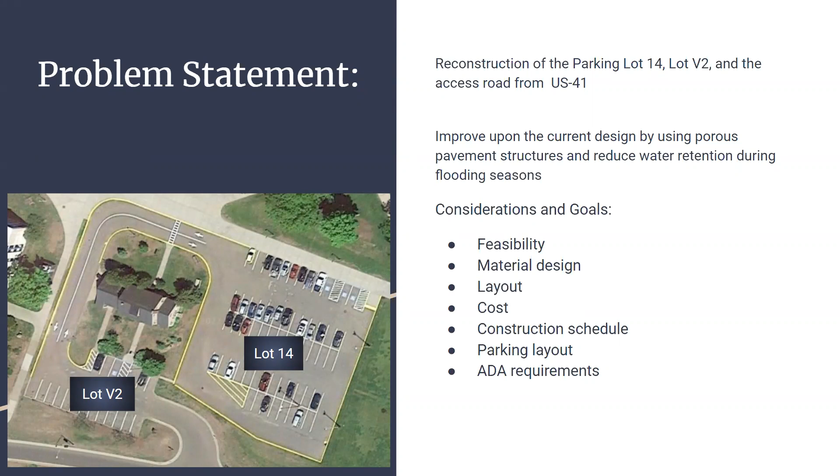Our considerations and goals were the feasibility of this design, the material designs of our porous pavement, the parking layout, our cost, the construction schedule, and our ADA requirements. So our current conditions: the known flooding problem in the southeast corner.

We didn't have any data under the pavement, so we went with web soil survey for our current soil conditions, which gave us an AASHTO A-2-4 or A-3 sandy soil, which has a good to excellent drainage rating, meaning it could possibly be used in our design.

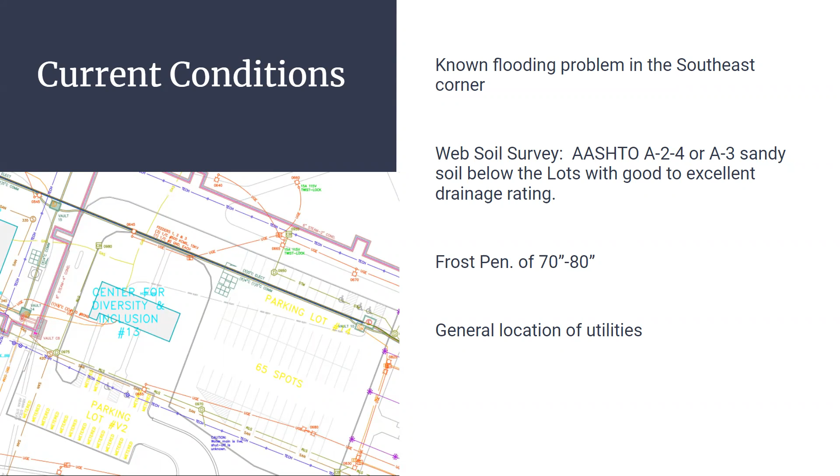We also have a frost penetration of 70 to 80 inches. It's good because Houghton is quite cold, and we have a general location of our utilities.

With this given information of our utilities, we have active storm and sanitary sewers, gas lines, water, electric, and steam vents. The concerns about these immediately were we had some abandoned electric, sewer, and steam lines.

No depths on these utilities. The sanitary sewer structures, just because we don't have depths, we don't know where they're at. And the southern water main has approximately 230 feet stretch of pipe that has no known shutoff.

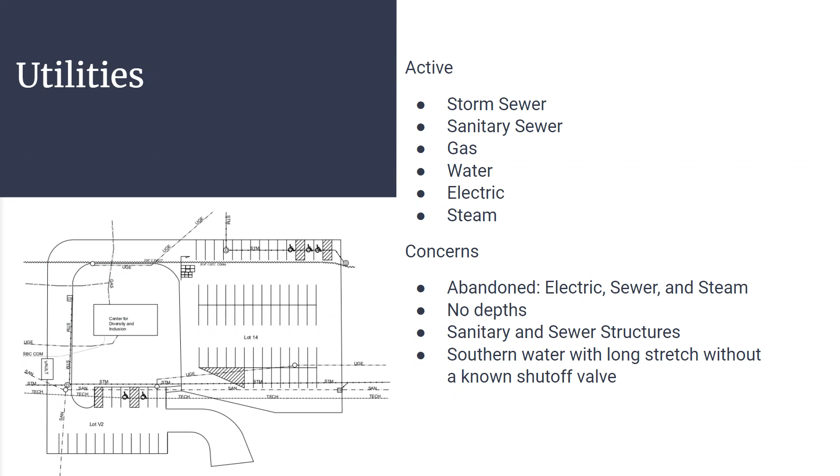So porous pavement is an asphalt that allows the water to seep through it into the ground below. Usually they will have a stone reservoir along with various other layers where the water can be held until it can be naturally absorbed into the soil below.

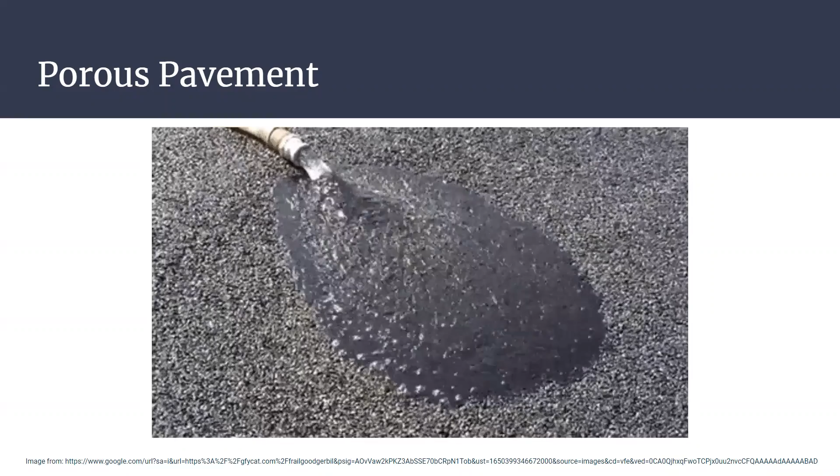On this slide, you can see a nice little demonstration of porous pavement. With normal pavement, if you've ever seen water on it, it usually just kind of spreads out and then goes to the nearest flow point. But with porous pavement, it just goes straight down.

Here's also a couple pictures that show the difference between traditional pavement and porous pavement. As you can tell, the porous pavement is a lot drier, a lot quicker than the conventional, which is very useful because it can reduce runoff as well as flooding, which is lot 14's problem.

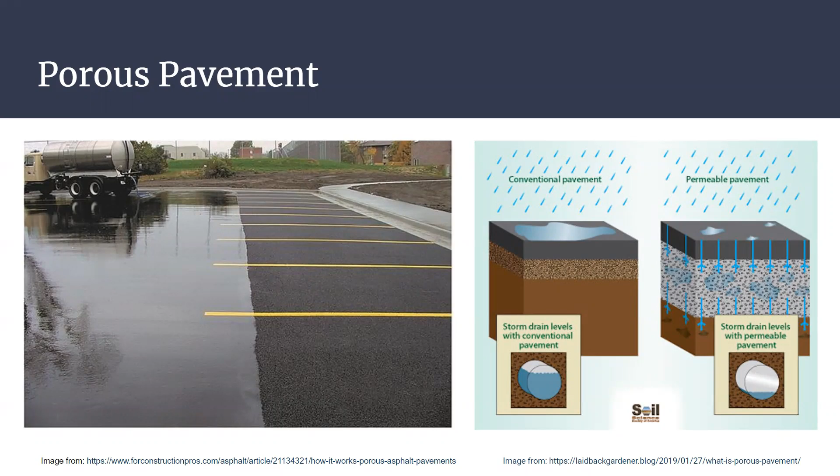For our research, our main document was the UNHSC document provided to us. That, along with some other references, gave us these main points.

The stone reservoir should have voids of about 30%. It should also have a minimum of a 19-inch thickness for a 500-year storm. Unfortunately, due to multiple constraints, we weren't able to achieve 19 inches for thickness, but it should still be able to handle at least a 100-year storm.

The slope of the pavement cannot be greater than 5% without additional design criteria. And for any areas where there is a higher elevation around the porous pavement, there needs to be a stone edge, which is basically just an extension of the stone reservoir that goes all the way up to the pavement. This will prevent excess runoff and sediment from reaching the porous pavement.

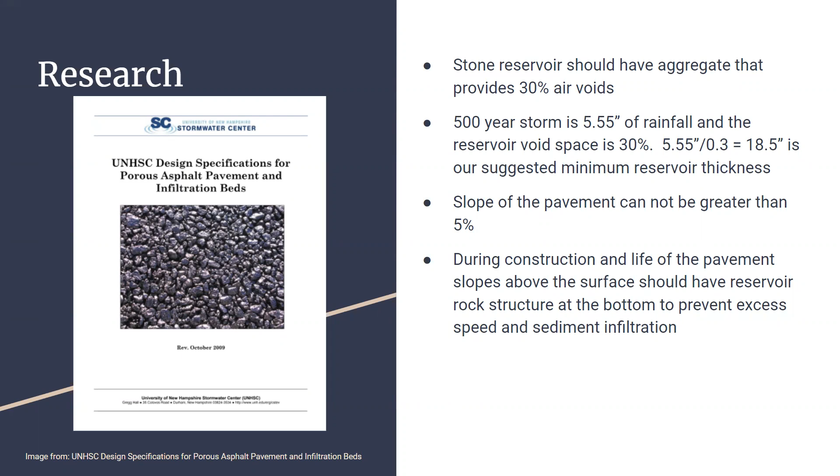Some of the disadvantages of using porous pavement is that we are limited to a suggested maximum slope of 5%, and this is because the higher the slope, the higher the potential for runoff. This is especially bad after years of use and clogging over time, so it gets worse. The porous pavement is prone to clogging problems.

Yearly maintenance is required, and that usually consists of a form of jet washing and large vacuum trucks. This is really important for up here because we get so much snow and winter is so long, and we use sand, and sand would definitely clog the pavement, causing it to not work as intended.

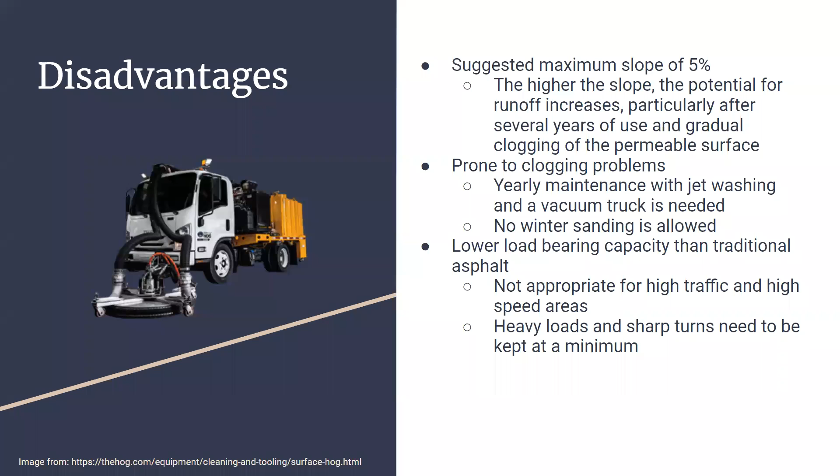The porous pavement also has a lower load-bearing capacity than traditional asphalt, and it's not really appropriate for high traffic and high-speed areas. Heavy loads and sharp turns need to be kept at a minimum.

However, some of the advantages are that it is green construction certified by LEED, and it reduces the volume of stormwater runoff from paved surfaces. It also increases the groundwater aquifer recharge through infiltration.

It has faster snow and ice melt, improves oxygen and water transfer to any nearby plant life, reduces and cools stormwater runoff, and reduces contamination and pollution in the ground.

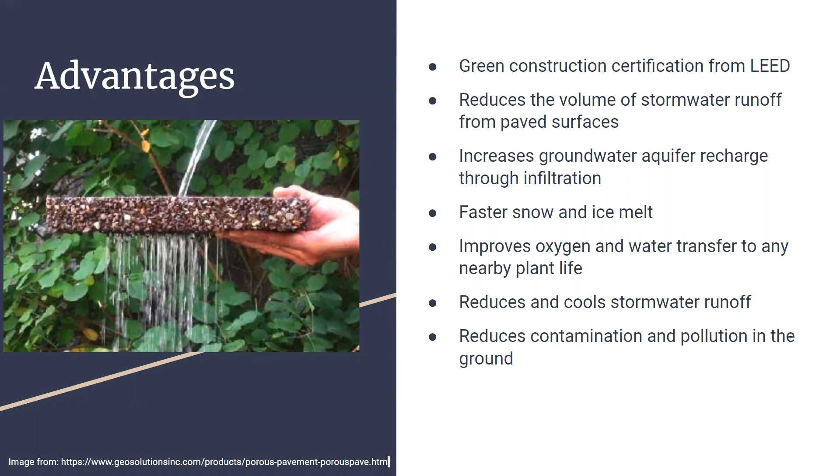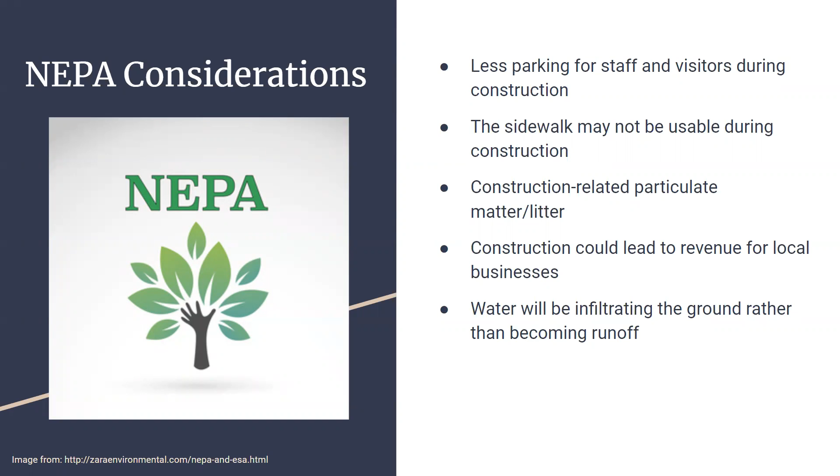However, the construction could lead to revenue for local businesses, and water will be infiltrating the ground rather than becoming runoff.

Some of our biggest challenges were the lack of original plans for both Lot 14, V2, and their access roads. We also have limited utility information. The southern water main has no known shutoff for quite a large span, and we had to make assumptions on all of our utility depths.

We also had limited knowledge of the material below the existing parking lot, and we are slightly concerned about the frost depth potentially leading to frost heave in the pavement.

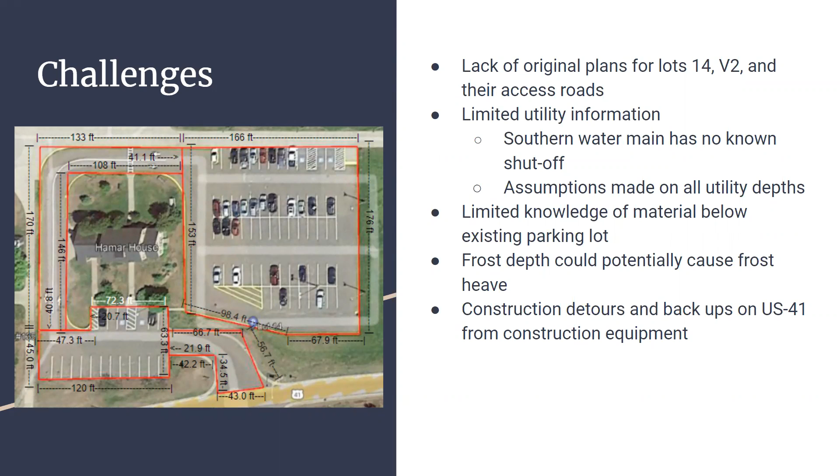The only other thing is the construction detours and backups on US 41 from construction equipment pulling in and out of the parking lot.

So the assumptions we ended up making were mostly for the utility depths. The water line, we're going to stick with a state average of 4 feet. Most of these utilities are based on state minimums or suggestions by Dr. Yu, so our electric line should be no more than 1 foot down.

The gas line should be somewhere around 3 feet, and we then assume that our steam line will not interfere with our design at all because it is fairly far down.

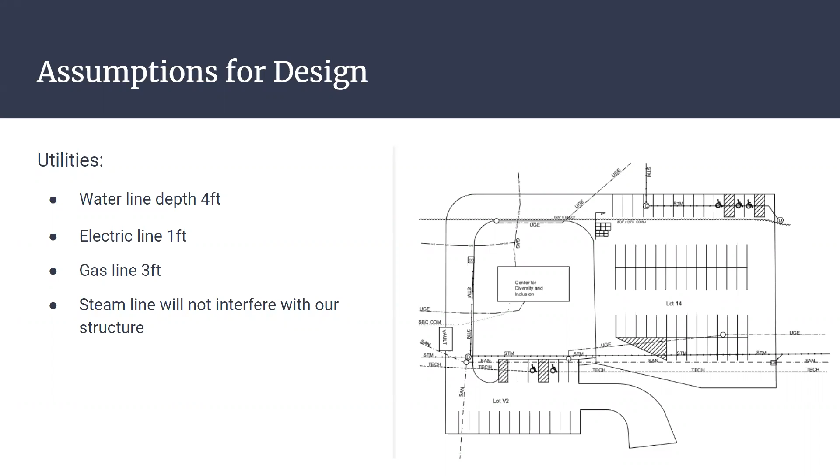The current parking lot pavement depth, we're going with 4 inches, and we're going to assume it has a gravel base of 6 inches under that.

Our sewer line, we're going to assume is 42 inches because that is a state minimum. The storm sewer, we're going to assume 2 feet based on construction experience and recommendations, but that will be removed as part of our construction.

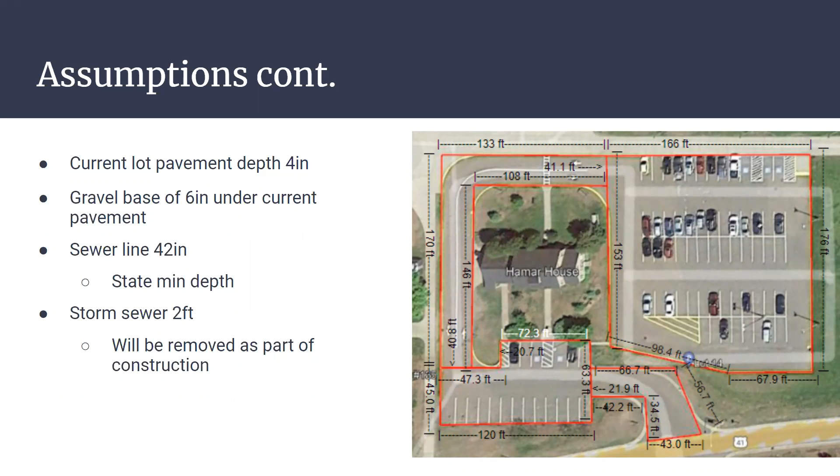So for most of our recommendations, we pulled from two sources of literature. The first being University of New Hampshire Stormwater Center, and the second being Wisconsin Asphalt Pavement Association and the Federal Highway Administration.

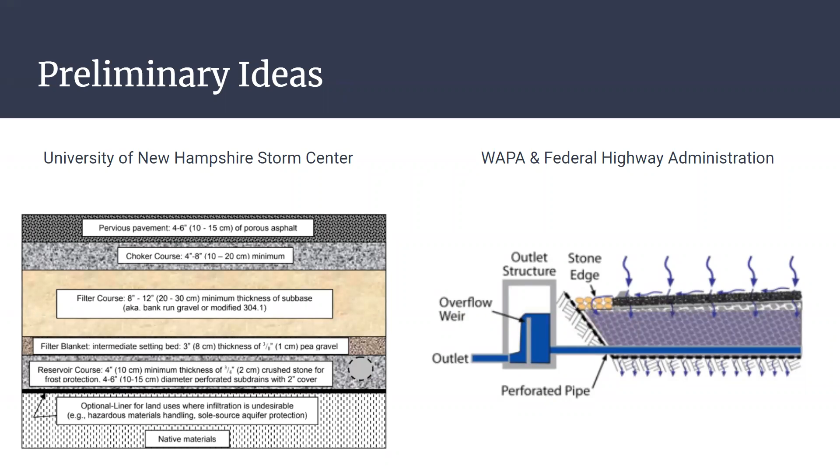This is just a picture from Oregon State that shows how the runoff will drain into our stone reservoir and eventually into the native materials below.

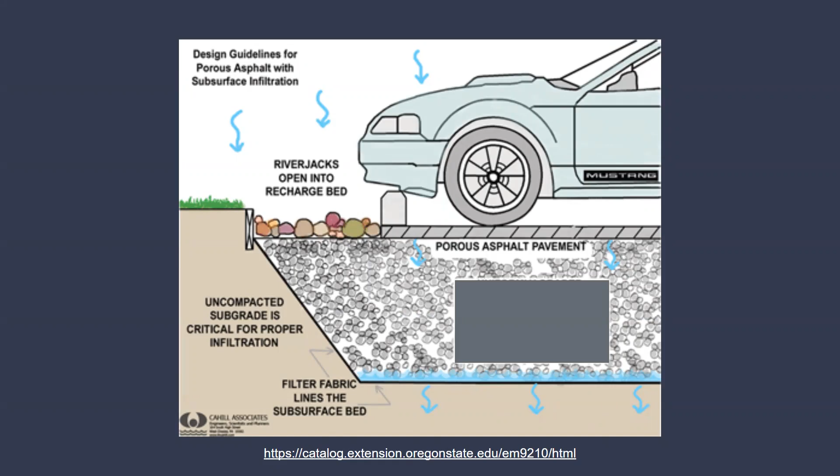So for our runoff area and rainfall considerations, a 100-year storm produces about 3.7 inches in 6 hours, according to the NOAA. Lot 14 and the surrounding paved areas will accumulate about 18,000 cubic feet in 6 hours.

Our stone reservoir will hold about 7,700 cubic feet, but the drainage is continuous to the native materials, so we're hoping that kind of mitigates the difference there.

But given the job price and the lack of utility information, our current design, we think, will be sufficient. Our current design is going to be 10 inches of the bottom reservoir course with 30% air voids.

On top of that will be a filter blanket, 3 inches of pea gravel. Above that will be a filter course, that'll be bank run gravel, 10 inches as well.

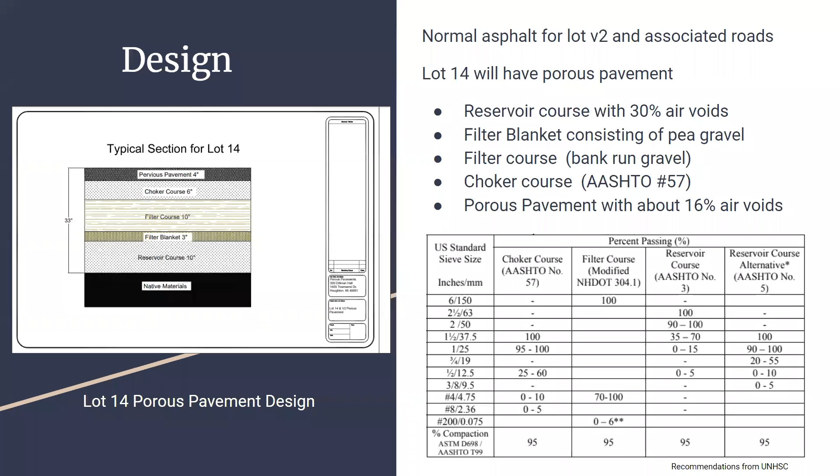Then on top of that, a 6-inch choker course with AASHTO number 57 grade gravel, and then on top of that will be 4 inches of asphalt pavement with 16% air voids.

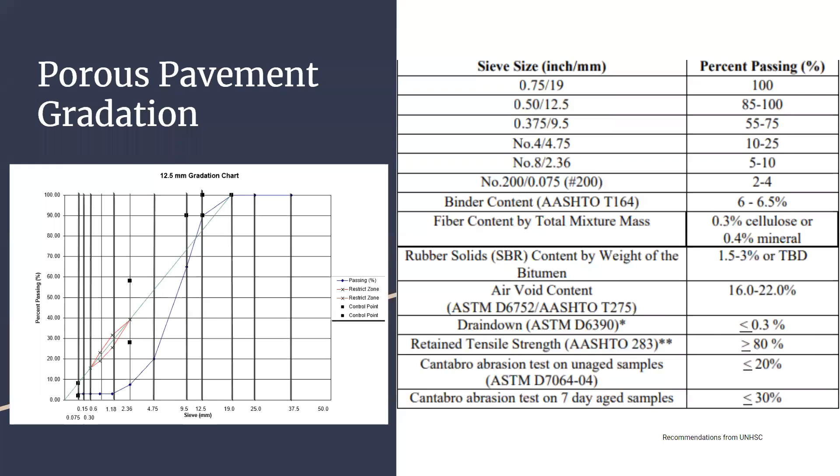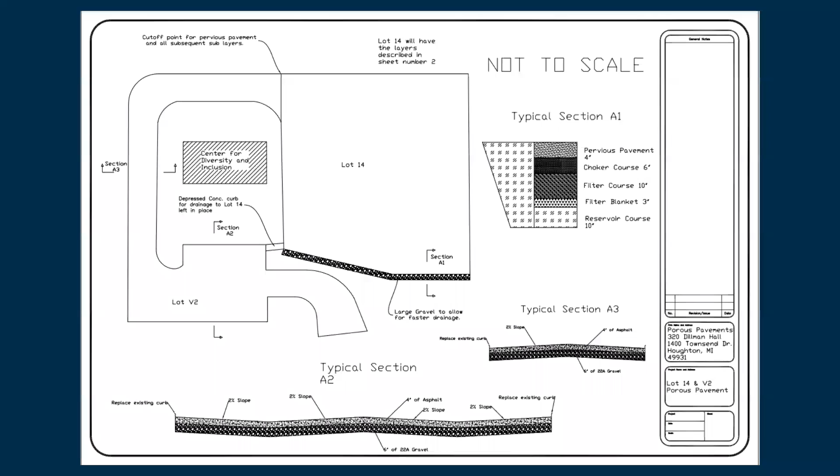Some construction considerations: the site will need to be fenced off, and any site drainage will have to flow off-site, likely towards the broomball courts nearby. Additional signage will need to be added, so some navigational guide signs like closed parking lots and parking lot moved to lot 5, which is near the Rosza. Also some warning signs need to be placed out, like trucks entering highway.

Some suggestions: we were planning on starting with lot 14 and then constructing lot V2 to save the porous pavement from any unnecessary issues.

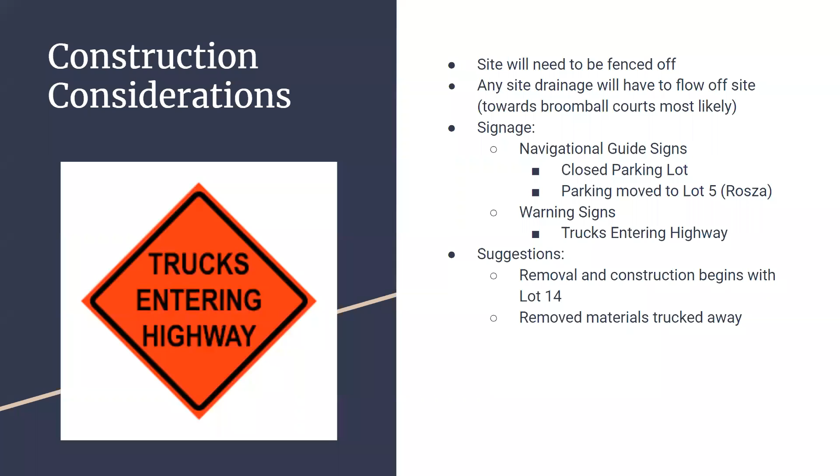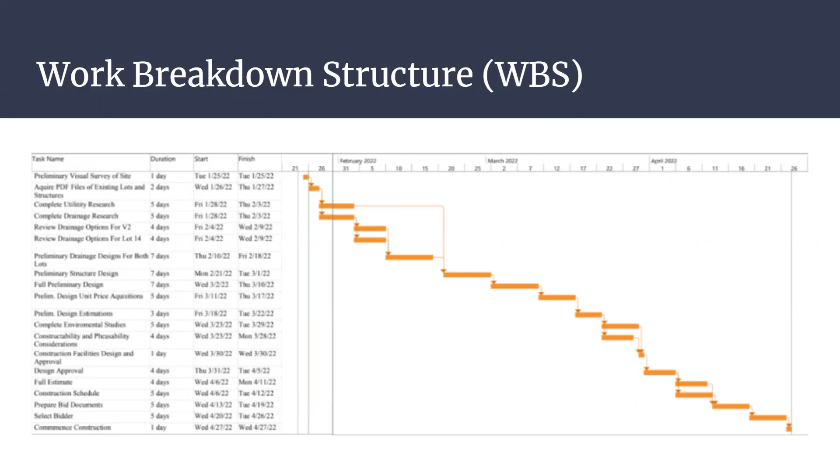For our work breakdown structure, I know it's a little hard to see the words. What I wanted to emphasize was the diagram on the right. It shows up initially at the beginning of the semester. We planned for a lot of these events to be done sequentially, but throughout our project, we found that a lot of these could be done in parallel, which was a big time saver for us.

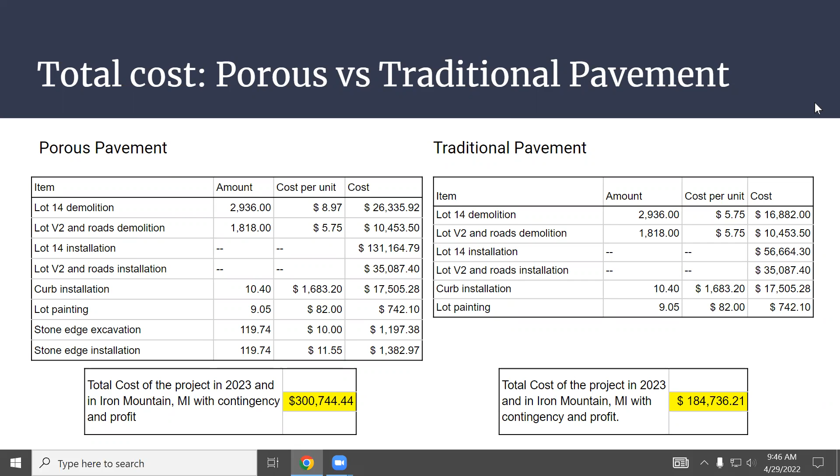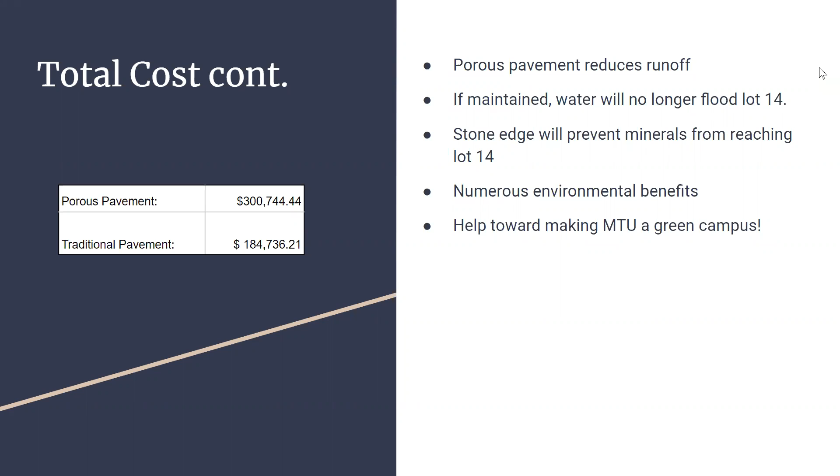While the porous pavement is more expensive, we still think it's the better option because it will reduce runoff and flooding in lot 14. The stone edge will prevent sediment and excess water from getting into the pavement. Nobody really likes seeing sediment at the beach, so that'll help. It also has numerous environmental benefits as well as helping make a greener campus.

For our hours, we came in a lot less than we expected. I would say that's because we worked smarter, not harder. It's also because we overestimated our hours, since we would rather shoot to do more work than less to make sure our project is up to standard.

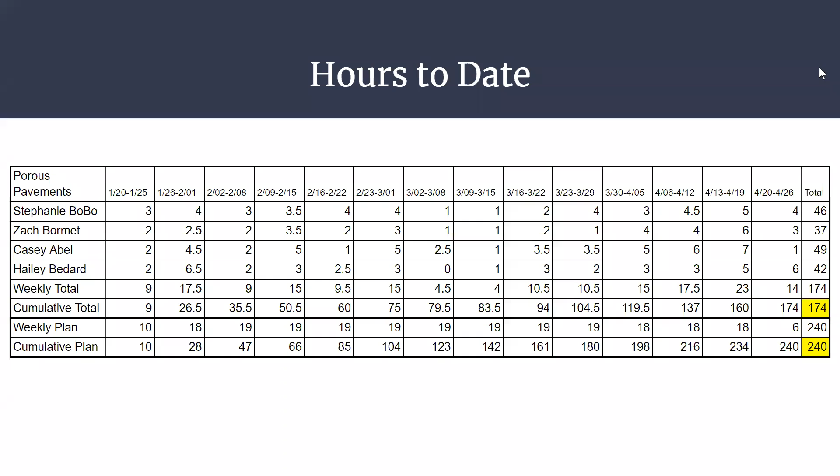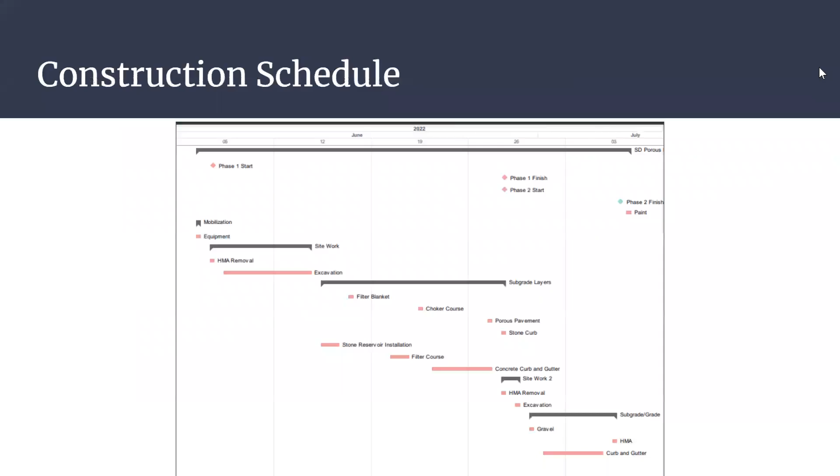I guess what I'm getting at is they're pretty small. If you go to bid that, your contractor would probably want to do it all at once. I can't see a contractor wanting to come in and build up lot 14 first. They're gonna flip their plan over and make this pavement.

That's something you might want to address. If I were a consultant, I'd have to explain that, unless the university wants lot 14 open all the time. It's gonna be a tough sell to a contractor.

You guys did a good job trying to figure this all out, really good. I worked in the UP, so I kind of got a little more advantage with you guys, but most of the water lines in the UP are about 6 feet deep. You guys did a good job putting that together, and it was pretty interesting.

The only thing I didn't see in your presentation, and I know you did this for a city or a township, is they might ask what is the amount, or how much beyond the edge of the parking lot would you expect to be used. Like that sidewalk by Fisher, would that be impacted? Would that have to disappear, or would that be okay?

I don't think so. I think, based on what I just calculated, it would be okay. We'd leave it in place. And the sidewalk going by would be okay too. I think you guys did a good job, and those are some questions I know come up when doing presentations for consultants—they always ask something weird, so I tried to cover that. Good job.

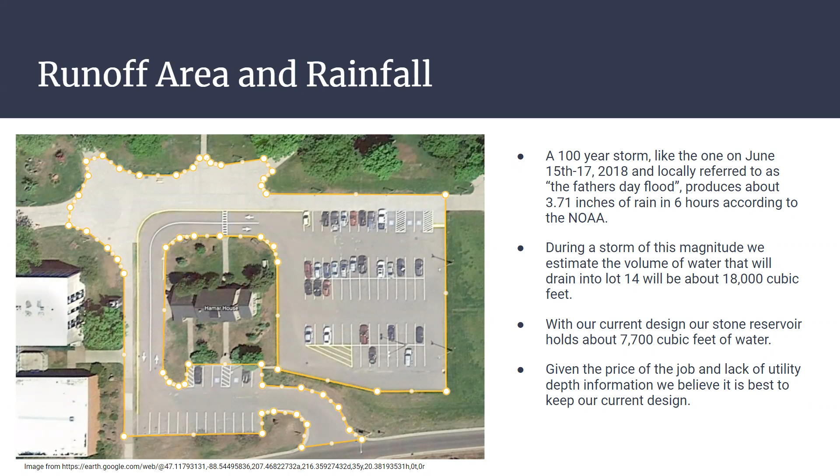Oh, sorry, I did not ask the fellows online if they have any questions. I did not hear that.